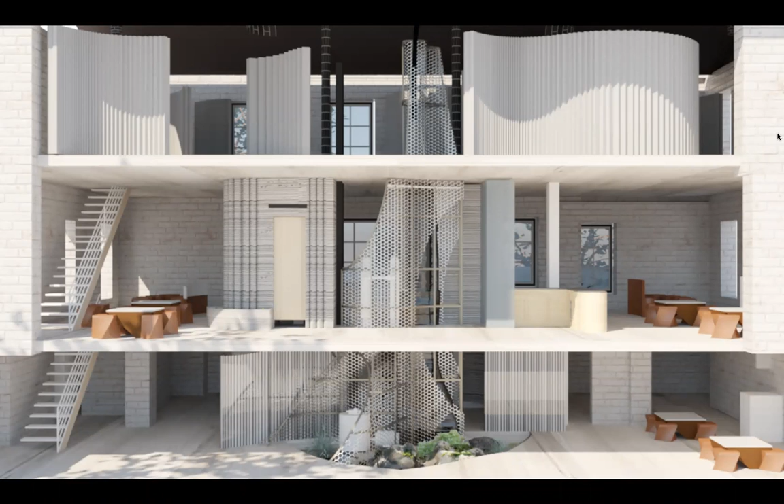In this presentation, myself and Jaya introduce our culminating proposal, the Water Core at House 3 on Governor's Island.

Our site, Building 3 on Governor's Island, was built in 1987. In spite of the abundant availability of brackish water in the soil 3 feet below, this house does not have any water supply. Through our Water Core, we propose a filtration system that takes this brackish water from the island and gives it back to the building for domestic use.

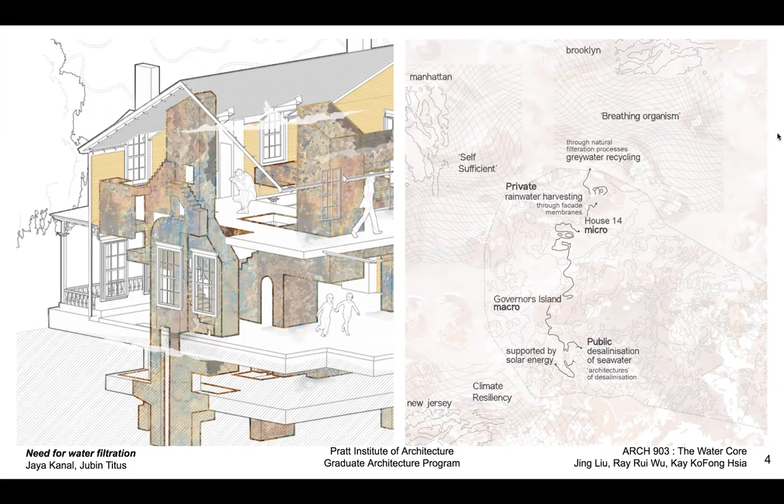This prototype, if introduced in inactive buildings on the island, eliminates the need for the island to be reliant on the current water supply from Brooklyn.

Currently, in the wake of the climate emergency and rising sea levels, systems for brackish water filtration have been highly experimented within the field at various scales, making brackish water filtration more affordable to domestic households. In demonstrating the multi-layered intelligence of various water systems, the project prompts new protocols for water filtration systems or cores.

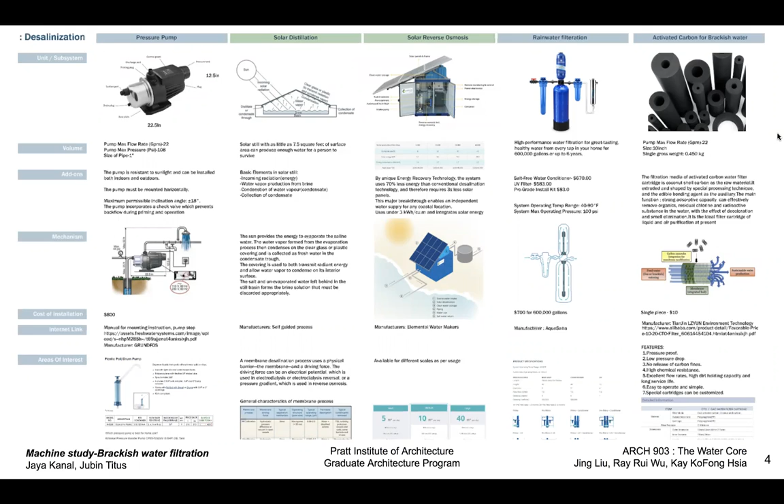We then take apart these systems and try various stacking options within Building 3 that would help take the ground level brackish water and filter it through the house.

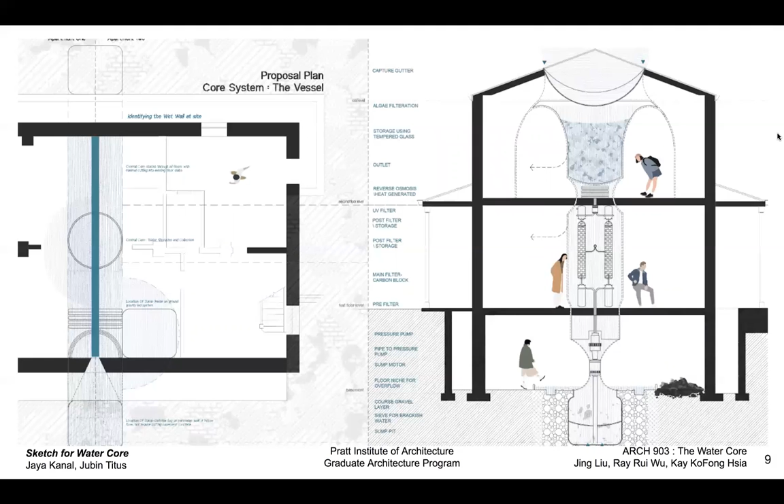These research diagrams explore the 3-semester-long findings to make brackish water filtration increasingly visible in Building 3, which, formerly a domestic space, through our Water Filtration Core becomes a center for cultural and educational programs.

Through our precedent study, we analyzed examples from ancient cisterns to the Pompidou Center to understand how the language and expression of water has evolved over the years.

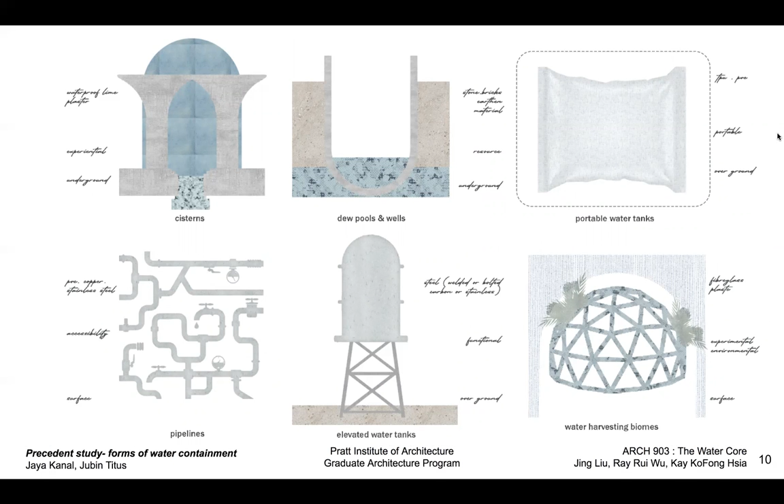From this study, we approached the system of portable water storage bags used in farming that can hold up to 5,000 gallons if needed. Using a water bag that is elastic gives us the platform to express the volumetric character of water when it is under pressure, encased within a structure.

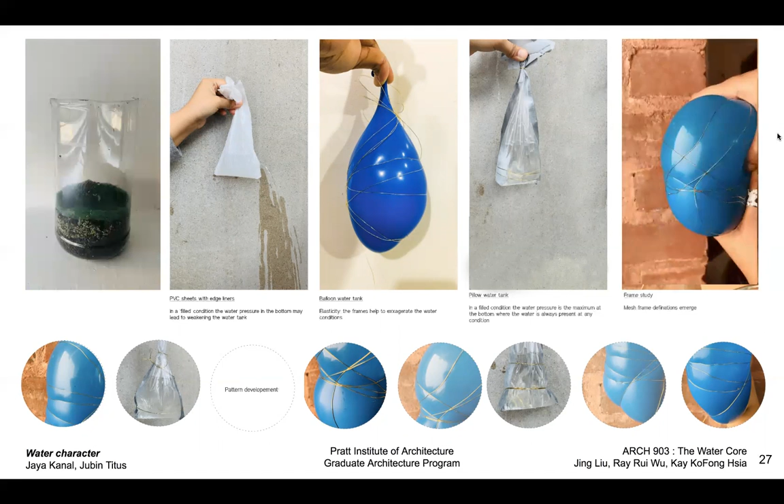We concept-tested with various textures and water bags to understand the multiple expressions the water bag would have within our proposal core. With the machine and material stack, we highlight the water touchpoint experiences the users have through the house.

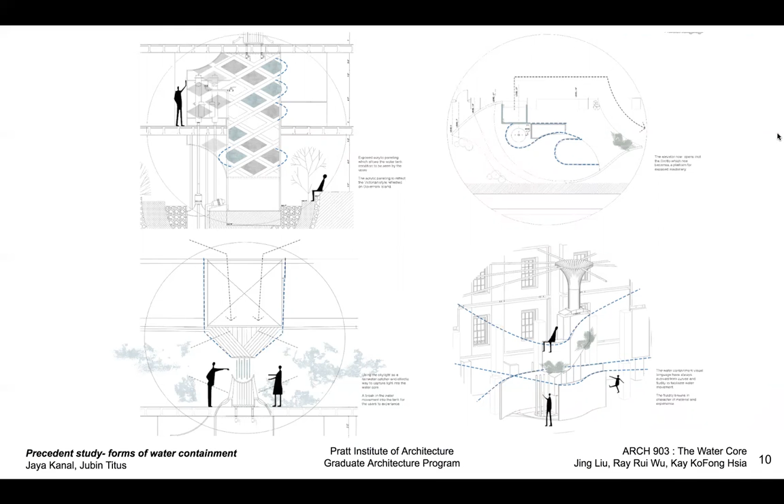One of these design strategies was to introduce various cutouts within the core on all floors, which would enable the users to experience the shrinking and filling of the water storage bag as the core filters the water.

The water core runs like a vertical tower from the basement to the second floor. It begins with a sump pit which extracts the brackish water available in the ground water table. With the help of a pressure pump, this extracted water is pushed to the first floor into a brackish water 4-unit filtration system that filters the water.

This filtered water on the first floor then travels through a pipe to the water bag adjacent to it. This vertical bag, 2 feet wide, spans from the basement to the first floor for stability.

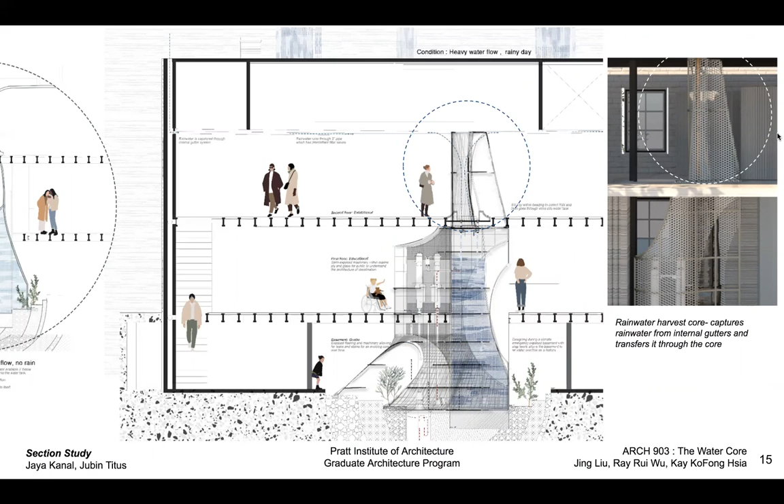The water core on the second floor acts as a rainwater collector, collecting the roof runoff rainwater through a system of internal gutters and making it travel through an inclined filter tube into the water bag on the floor below. The water core consists of machines for brackish water filtration, an 800-gallon water storage bag, and rainwater collecting pipes.

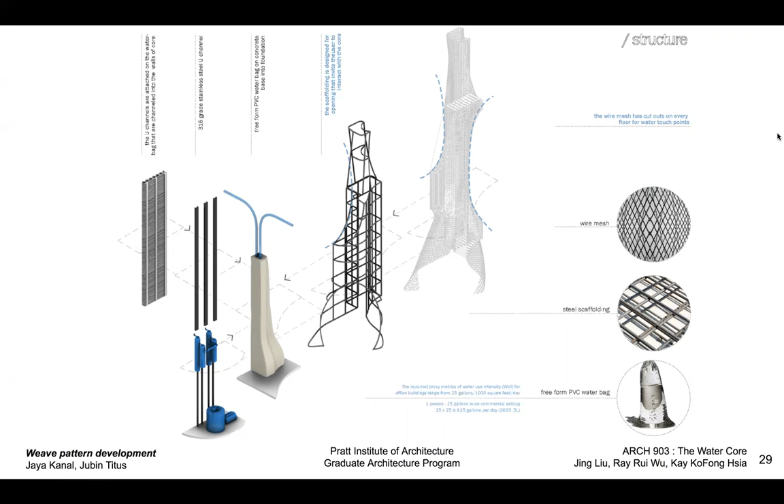We stack the machine and the water bag closely into a steel scaffolding layer with wire mesh. The scaffolding helps keep the core intact structurally, and the thin wire mesh helps alter the shape of the core when the water bag fills and pushes against the scaffolding, leaving an impression.

From the material and model studies, we developed a strong weave pattern that the carbon fiber would take around the core, which also loosens in some areas where the water can be exposed through the framework. The different types of fiber weaves are an opportunity to express the filling water bag.

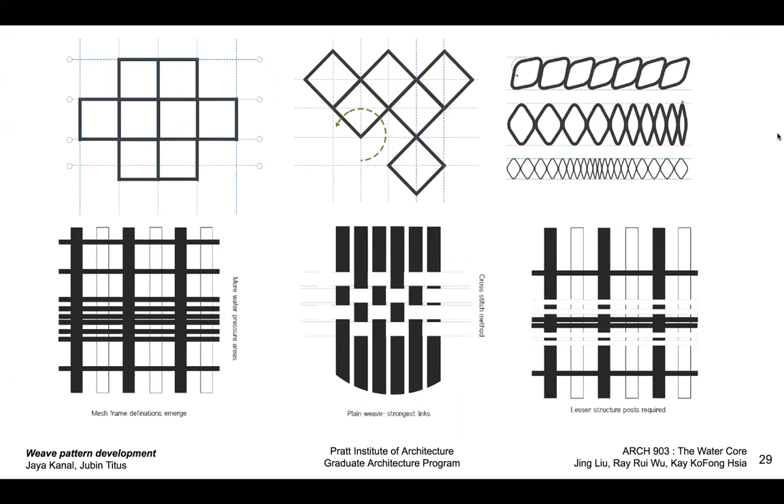In the basement, the floor is cut out to expose the sump pit and the water storage bag. The basement holds the place of the grotto, where the ground from which the water is extracted is exposed to the users for viewing. The level of exposed ground in the basement changes with the water overflow condition.

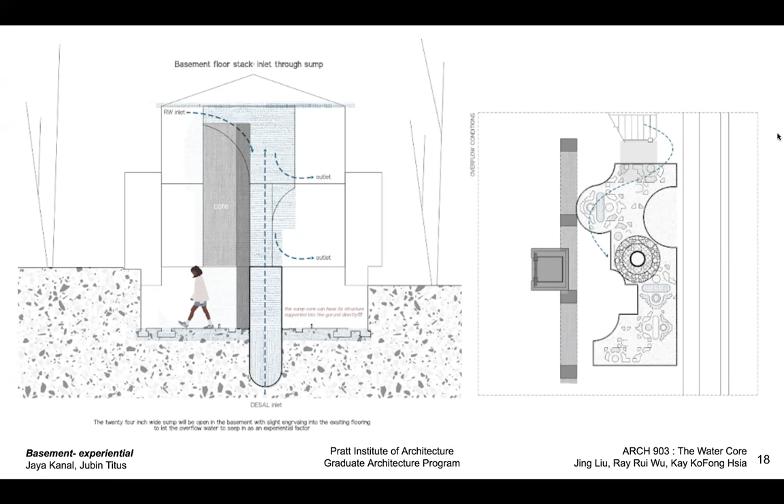It critiques the dominant and distinctly Western mode of knowing and representing water that has been described by political ecologists as modern water.

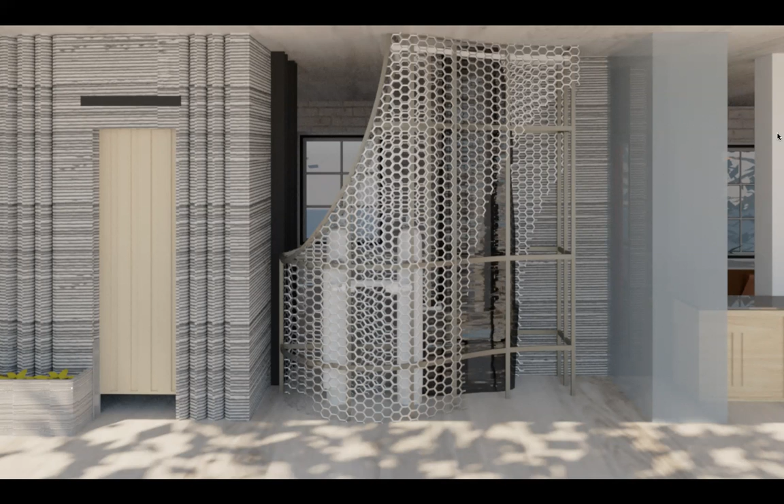On the first floor, the core consists of the filter machines and the water bag that stores the filtered water. The water bag becomes thinner on this level as most of the water pressure focuses towards the basement. The scaffolding cutout helps users see the water bag grow and shrink as it gets filled.

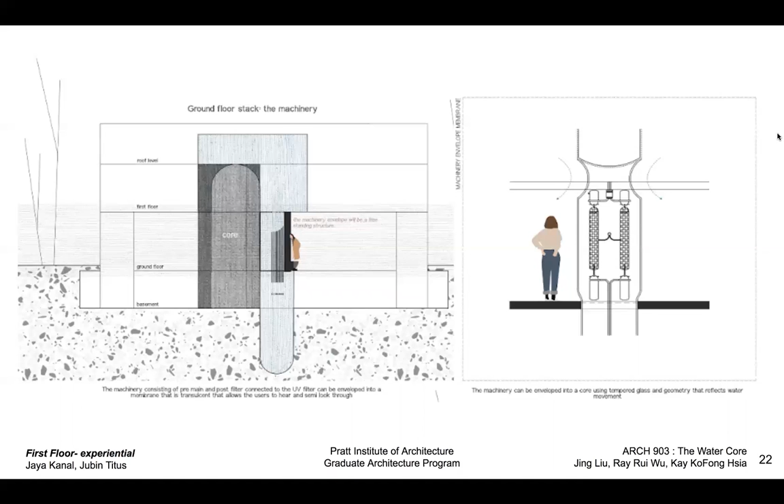The elevator proposed by the core group helps users travel from the second floor to the basement, seeing the different stages of our exposed system of water filtration. The experience on the first floor is the machine and water bag core, which allows users to see the live brackish water filtration as it falls into the tank, causing the water tank to shrink and expand.

The second floor consists of the rainwater core that pulls the roof runoff water into the house from the perimeter through an internal gutter section. The exposed ceiling pipes carrying and filtering the rainwater to the core become the experience on the second floor.

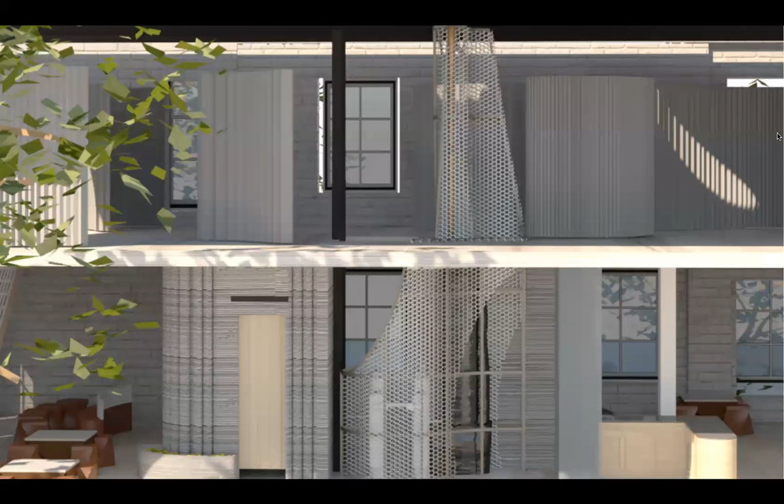Water is no longer hidden behind the walls and is celebrated through House 3. We use rewilding as a lens to investigate and independently develop real and speculative solutions for the future. Thank you.